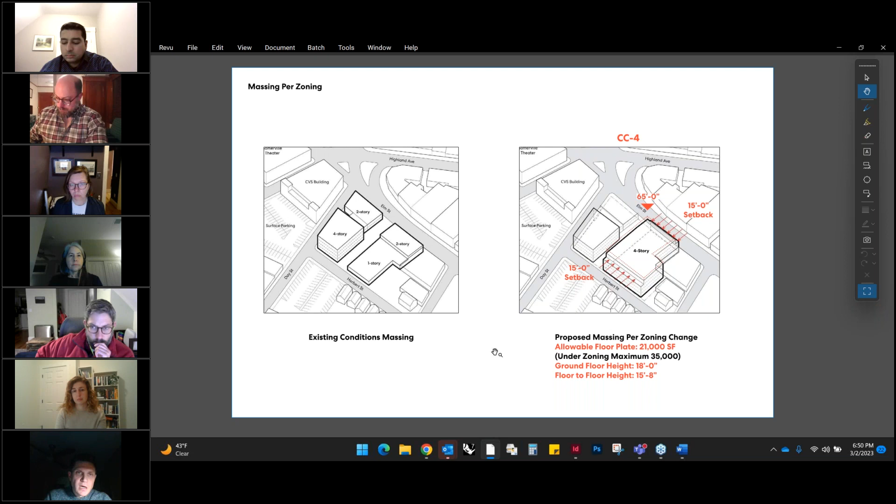But you'll notice that our floor plate, given the kind of zero lot line condition on our plaza, on the building, our floor plates are roughly 21,000 and change. The existing condition that you would know today, the two-story project or two-story volume is currently where Chipotle is. This two-story is where Starbucks is. This is the open space in between.

So when we started the project, just to understand the massing, the kind of as-of-right conditions, we could go 4 stories, but we made a very deliberate decision very early on to be as contextually sensitive to this very important place, a place near and dear to our hearts as people who spend a lot of time in Somerville, especially in Davis Square, and that the building being 4 stories on the street may not have been the most appropriate way to start the project.

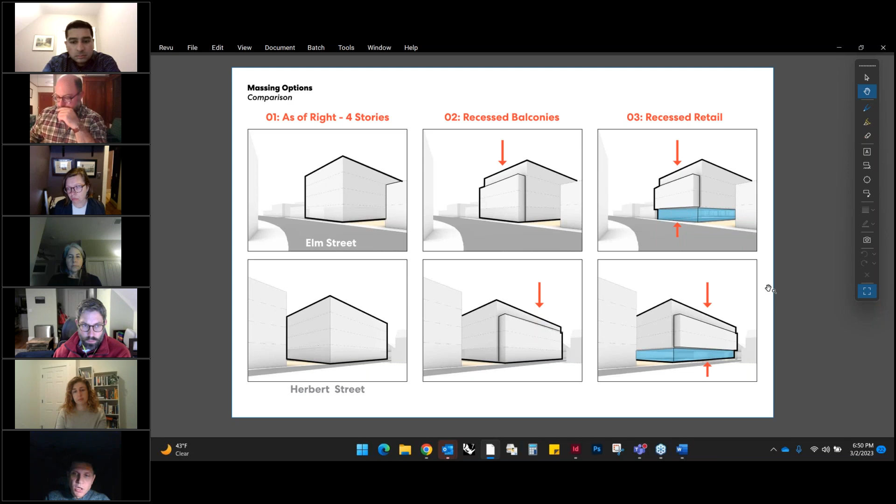So one of the first things we did, in addition to recessing the retail, was to also recess the 4th floor down to create a two-story volume at the street to bring the scale down. We've done that both on Elm and Herbert Street. That was a kind of fundamental massing decision that happened very early on.

And then once we established this kind of massing and made sure we're complying with all the zoning constraints on the property, it became very important to us to draw upon the place, to make this a place where people gather and meet, and a real catalyst for civic destination in Somerville.

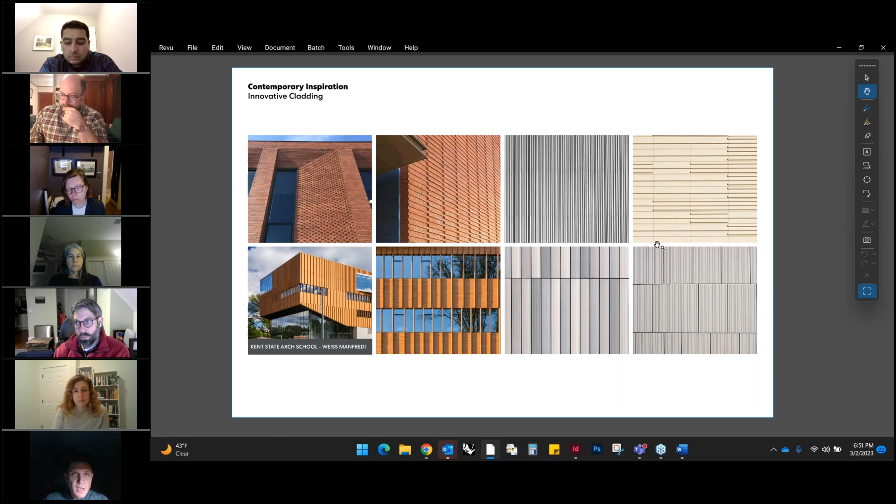So we looked at the 58-day building. We looked at a lot of the materials around the site, looking specifically at the adjacent building at 260 Elm with the kind of limestone cladding on that face and how the project might respond. And what we decided to study is that those very beautiful textures of the past could be reinterpreted into a more contemporary condition using the same material or the same tone of material. So working with pattern and texture of the brick, and also looking at more contemporary cladding like terracotta for the facade that is aligning with Elm Street and Herbert Street.

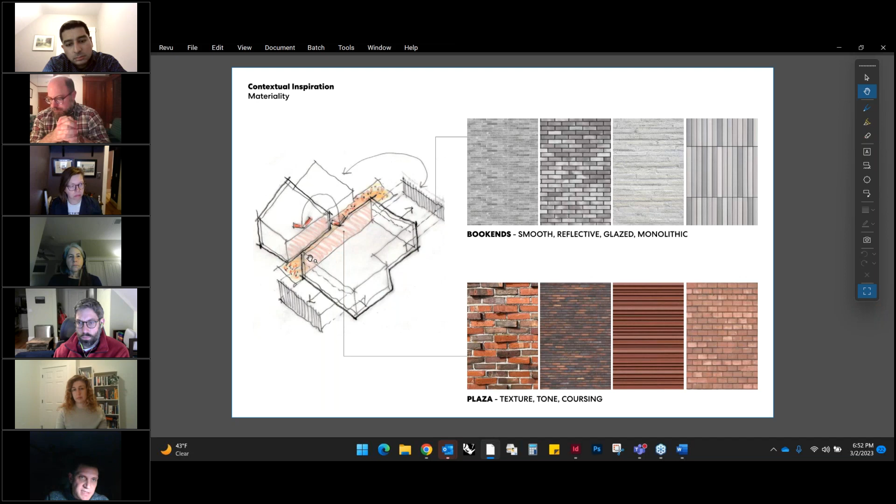The building in a way is stepping down towards the streets, but always creating a new kind of catalytic relationship with the open space. We started thinking about how the project might have two different faces: one face towards the street that becomes lighter in tone, more referential to the limestone facade you just saw, and a more contemporary masonry facade facing the existing 58-day building.

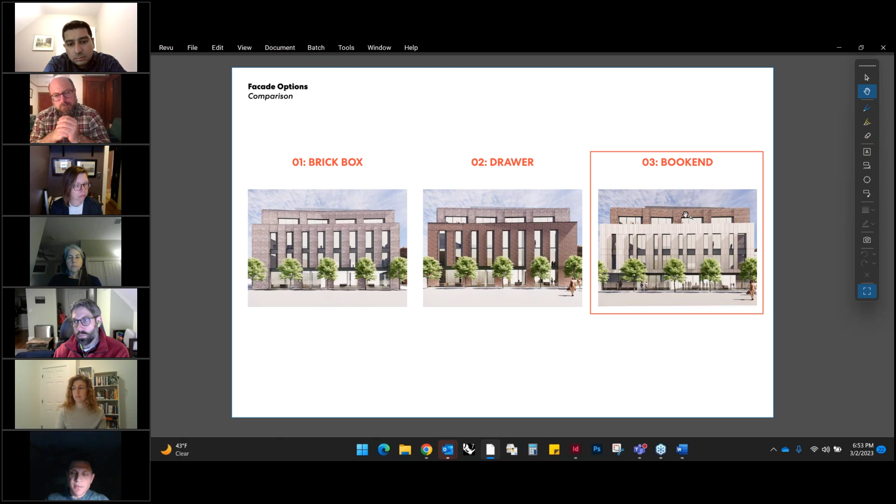When we started with the UDC process, we presented a number of facade scenarios to them. Overwhelmingly, we received a lot of support for this idea we called the bookend - the ends facing Elm and Herbert Street would be treated slightly differently to match the tone of the street condition, while the brick box behind would address the same height and scale as the brick 58-day building.

So we tried to lay out these elevations to make a very sensitive and contextual project, something that fit within the scale of the city, something that really activated the ground plane and created a new civic plaza with a direct relationship that would engage the neighborhood in a dynamic way.

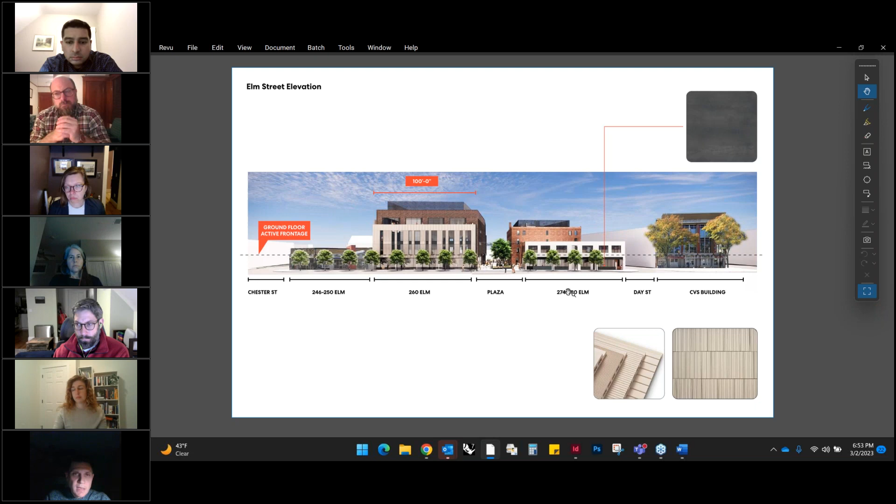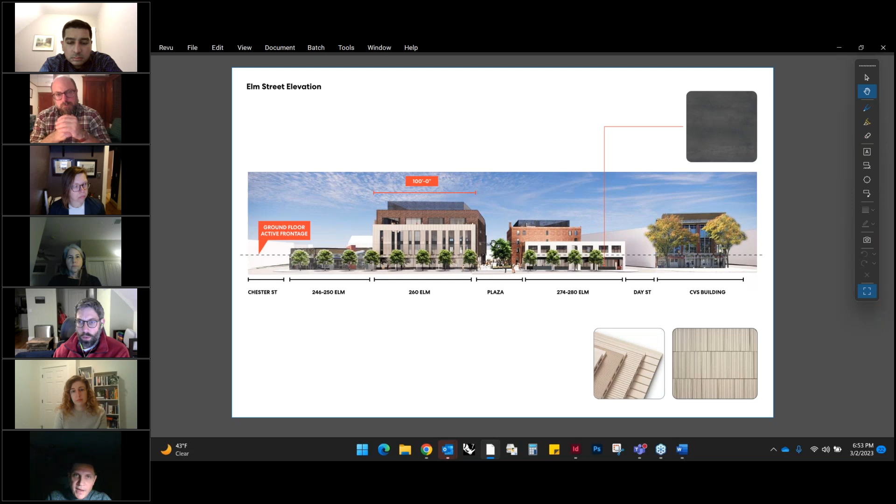You're starting to see the front elevation of the entirety of Elm Street, all these buildings you know quite well, with some very precise and discrete updates to the 274 building, letting our building create a kind of contemporary partner, or relative, to the existing condition.

At a closer scale, this is just to give you a reference - this is where Chipotle is, this is where the current Starbucks is. A couple of deliberate material moves follow.

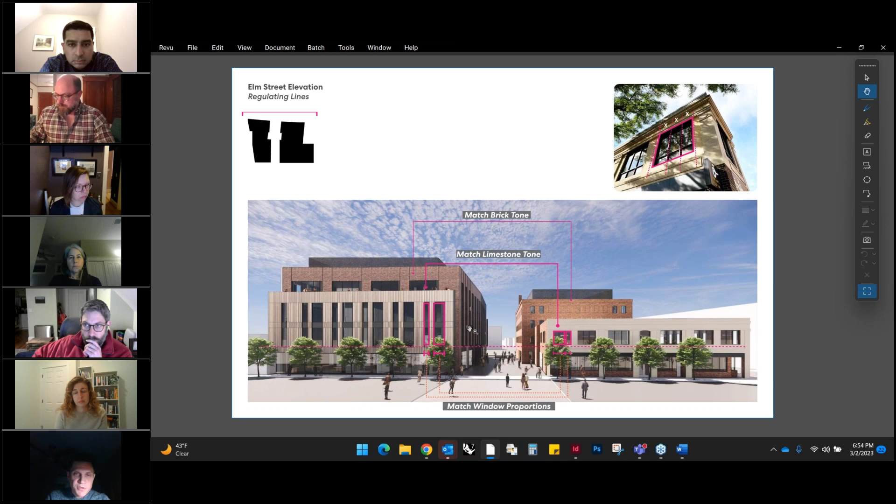Could we start to find and study materials that match the tonality of the limestone cladding that's very thin on the Elm Street side? Could that become reinterpreted with some sort of terracotta rain screen? That seemed to make some good sense.

Then the brick box behind - could that match the same kind of brick tone or texture of the 58 Day building you see in the background? Again, through the UDC process, we worked very closely with them.

We tried to make sure this Elm Street corner was open to the street and became a very engaging, almost porch-like quality. We subtracted back the retail, held it back here, and created a new covered condition - what we like to think of as a porch to the civic space, a new sheltered gathering place along Elm Street. That seemed a very productive way to continue.

We've studied the materiality of the terracotta and the signage with them - all things that we ultimately felt, after three UDC meetings, really helped the project be better.

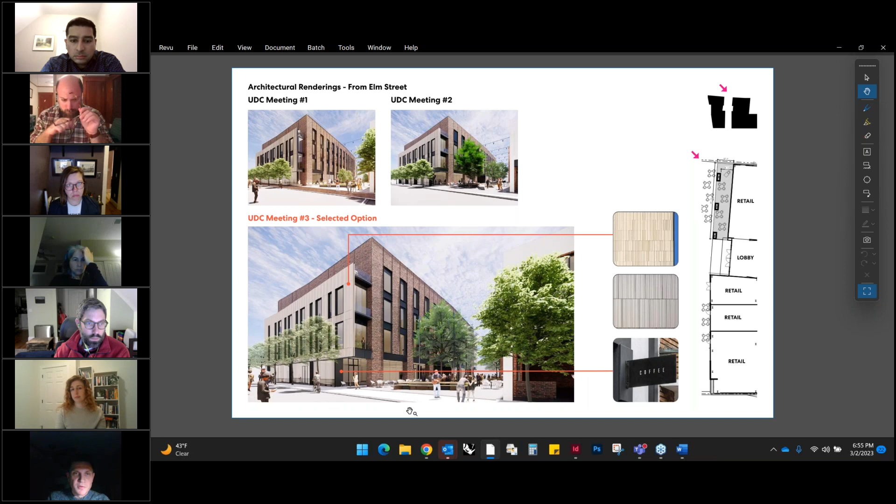I'm going to conclude with a couple of views from the Elm Street side. This is again where Chipotle is currently located - the new building here, with the activated ground floor, roughly 15,000 square feet that Welch spoke about, and the contextually modern approach to the building and architecture.

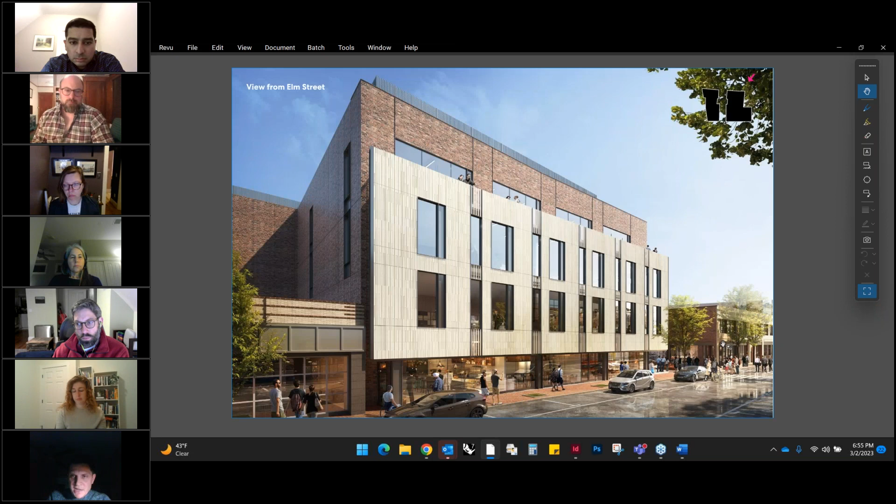Just a view looking back towards Elm Street - this is roughly where the existing bank is, trying to set up a really dynamic and engaging pedestrian experience.

Facing the existing building, this is the brick portion. You're starting to see how there's a very clear logic about how the structure meets the ground, and in those bays in between becomes retail, or a kind of mid-block lobby, which we think will really help activate the length of the entire civic space.

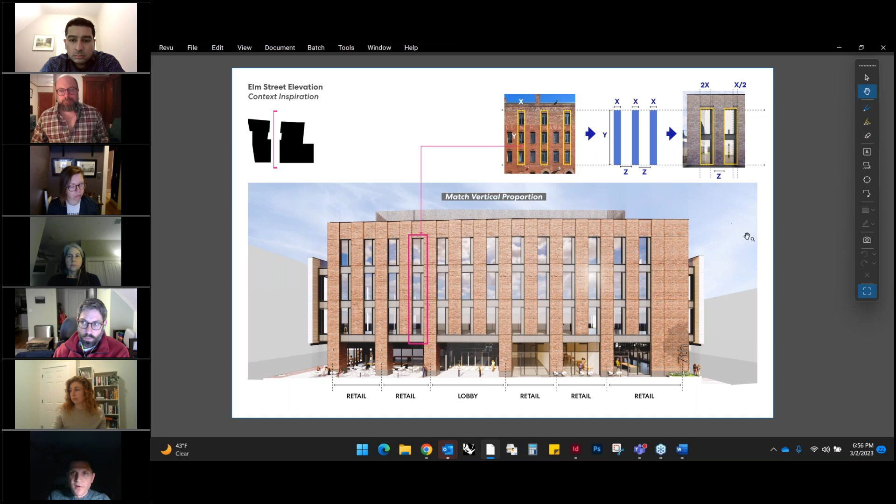Starting to look at some inspiration from the existing openings and proportions of the windows on the 58 Day building, and how they might inspire a more elongated profile that still feels related to the existing building.

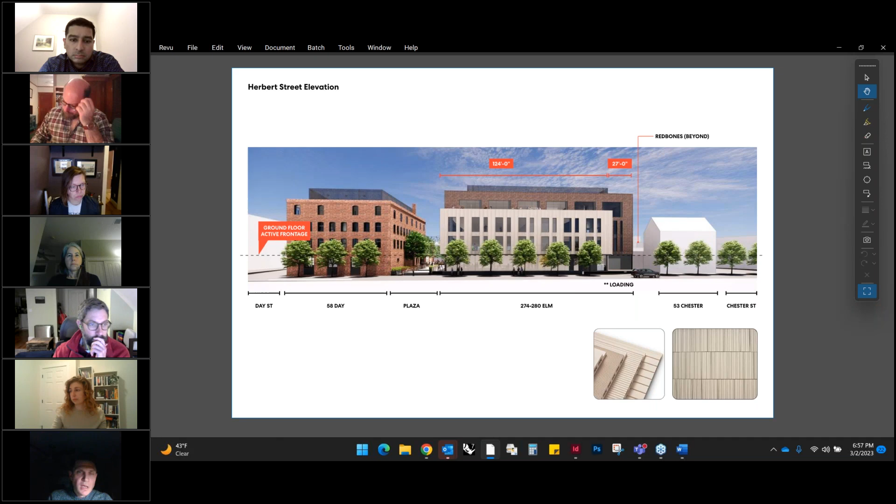The other elevation of the project that's quite important to us is the Herbert Street elevation. Again, you're seeing the side of the existing 58 Day building, and trying to create a similar type of architecture on this facade where we're not making a four-story building - bringing the scale down, having an activated retail frontage, creating a newly accessible pedestrian and civic space that Gautam will speak about in a moment. This, again, is something we studied closely with the UDC, making sure we got the right proportion and that it felt as contextual as we could make it.

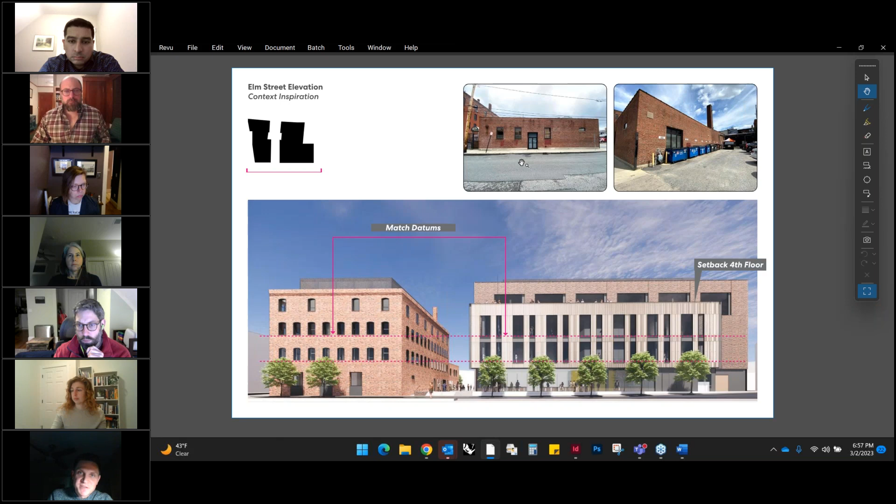A couple of ways we did this on a closer scale is really starting to look at the datums of the existing building, how those might translate or project across and inform the floor elevations of the new building, and taking what was quite tired and exhausted facade facing Herbert Street and creating a very vibrant new place.

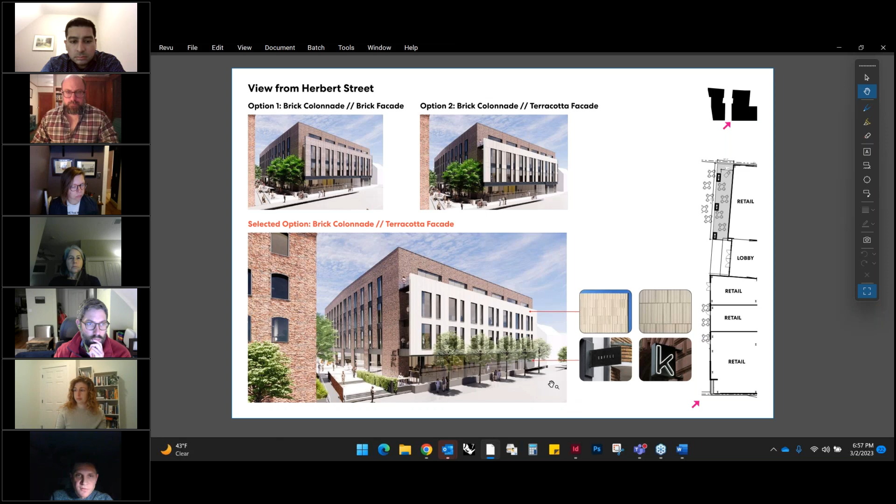Here we did a number of studies in the detailing and the tectonic, all reviewed by the UDC. They came back that these ends, these bookends if you will, could read like a very beautiful plane, crisply detailed, and very elegant, floating above the retail.

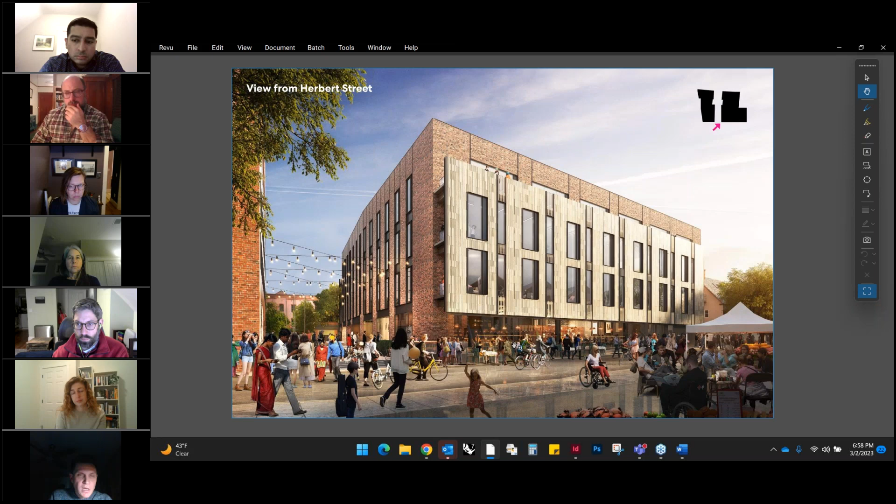So here's a final rendering of what that might feel like. This is a farmer's market going on, the very vibrant farmer's market that happens on the adjacent parking lot. That view looks back across the new Civic Plaza that Gautam will speak about in a moment, showing the potential of this new architecture at 256 Elm.

I think in addition to the architecture, it's important to talk about the programming of the building as well, now that you have a sense for it. As I mentioned earlier, we have 15,000 square feet of ground floor retail and an additional 5,000 square feet of clear story kind of retail from Herbert Street.

Of that, 6,000 square feet will be dedicated to ACE type uses. And we have been working with the city, and in our development covenant have agreed to keep 2 of the 3 Elm Street facing suites at below market rate to make them affordable for local businesses and uses.

It also stems over to outside of this project, to the renovation and work being done at 58 Day Street, which will create new retail bays both on Day Street and onto the new activated Civic Plaza, giving it a true community feel and gathering space in Davis Square, in addition to the great atmosphere that already exists there.

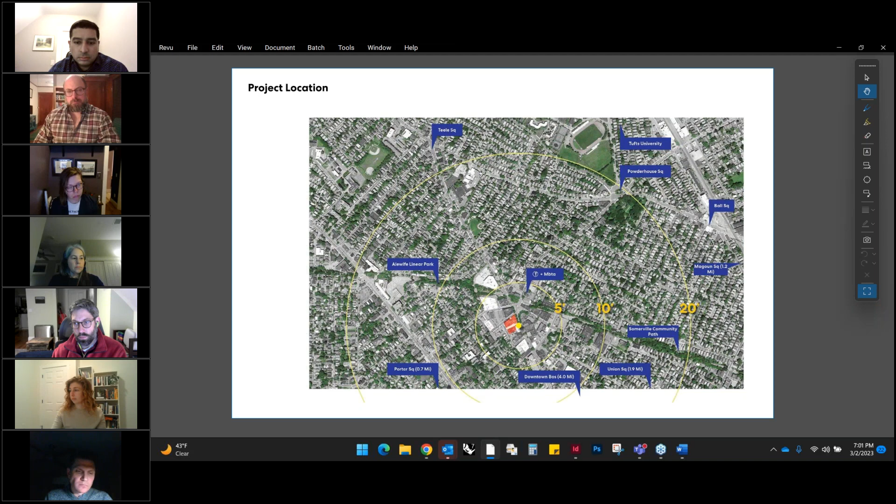So when we look at where it's located, and from our early conversations with OSPCD and staff and Courtney and others, we also looked at what open spaces exist around Davis Square right now, mapping out what opportunities they offer to the neighborhood.

We went through a very detailed process of looking at all of the types of amenities and how those open spaces are used, primarily to understand how what we are trying to do at Davis Square can differentiate itself and add to the overall open space and social fabric, creating the types of amenities and opportunities we very much need to help energize this neighborhood.

So those are the key drivers in looking at how we want to think about the Civic Plaza itself. We went through a process of rezoning where the open space has been committed as a civic space, from the owner, to make sure it is maintained as a civic open space for the city, for the neighborhood, and continues to be an integral element of the entire Davis Square culture and fabric.

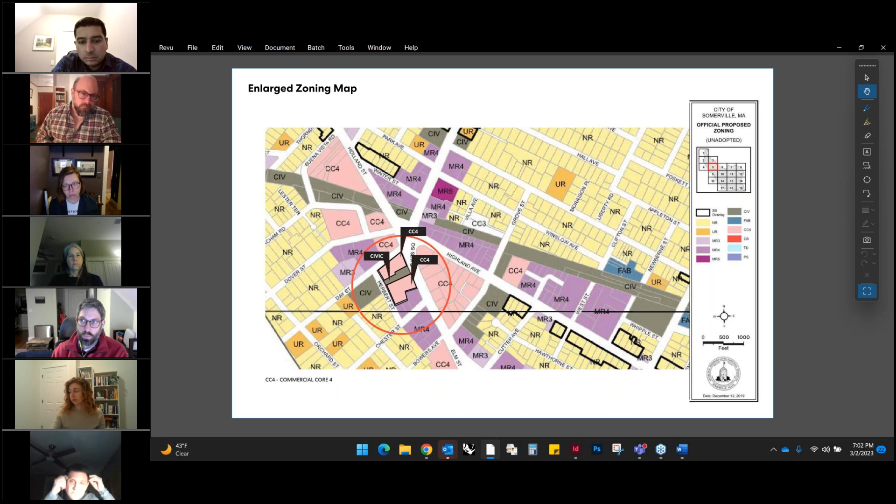From the very beginning, we thought about this open space as a key element, and we called it the seventh spoke, building upon the civic realm of Davis Square—the streets and pedestrian walkways that make this unique. We thought about how the plaza should be an extension of that civic realm, a place that helps catalyze the rest of the public realm as we think about the future of Herbert Street and some of the parcels to the southwest. So we think of this plaza as that seventh spoke.

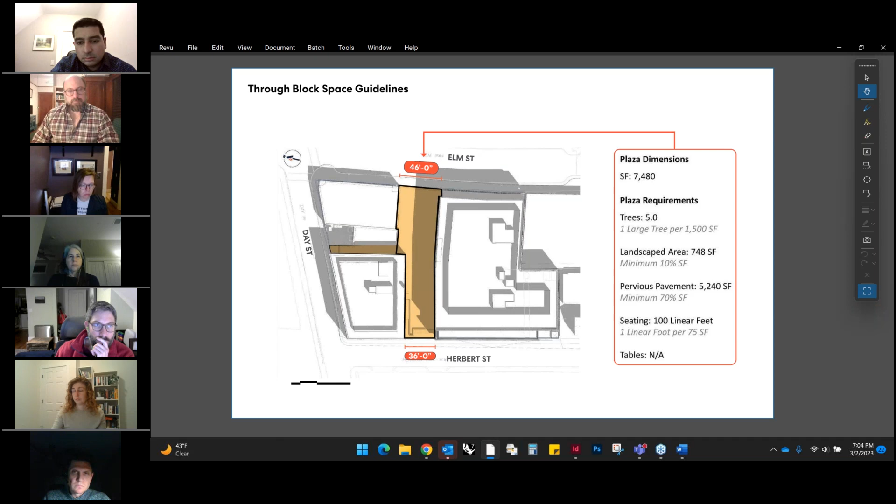It's a very linear space—I'll show you some photographs. In width, it varies from 46 feet facing Elm Street towards Herbert Street, narrowing down to about 36 feet. We didn't want to treat this as an accounting list of boxes to check, but really take the spirit of what we're trying to achieve and go above and beyond on many of these aspects, making them integral to the overall concept and design.

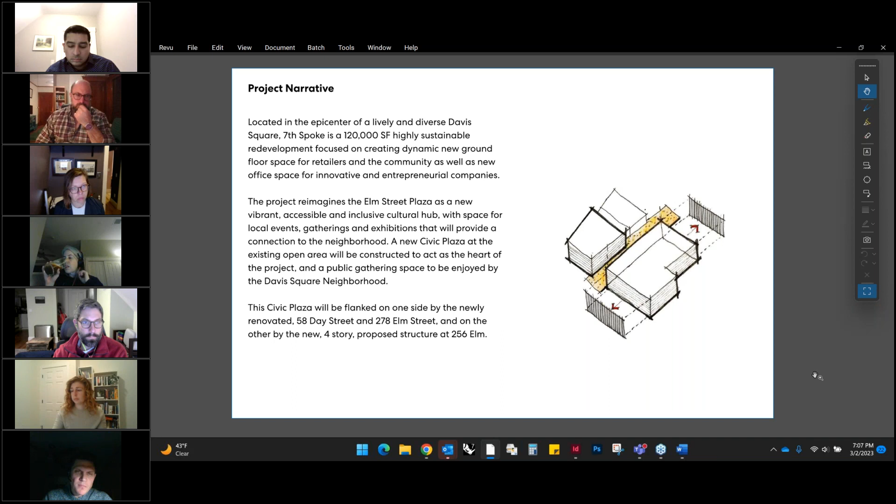From a broader context standpoint, we've always been very aware of the surrounding condition, the location of open spaces, and how it relates to pedestrian flow and transit connections—where we expect a lot of pedestrian flow to be, and how we can make it more visual and visible from view corridors where pedestrians will access this plaza, contributing to how the rest of Davis Square continues to evolve and develop over time.

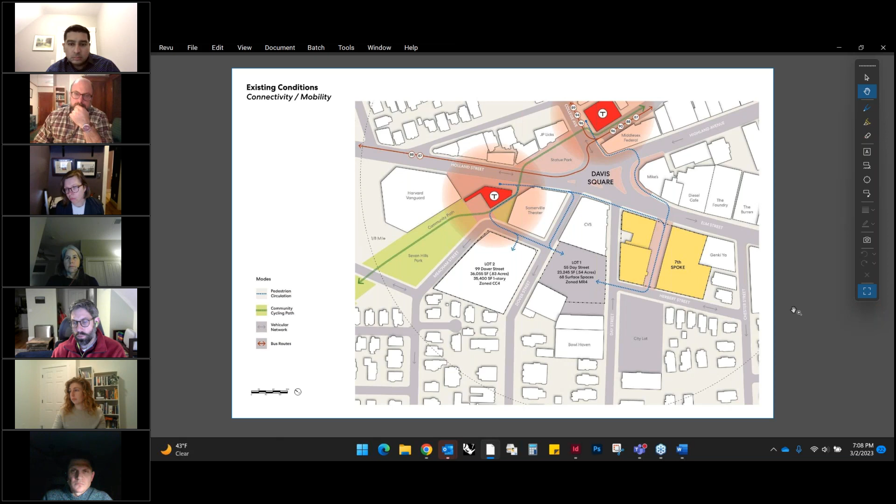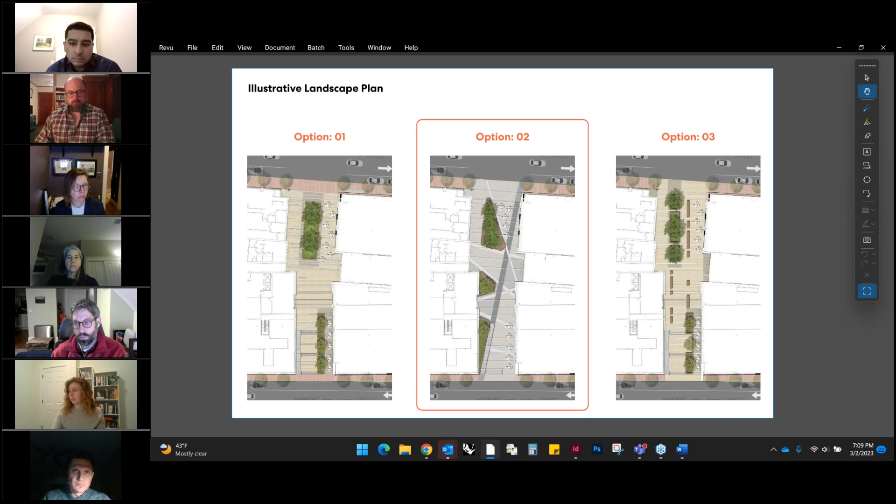Everyone, including us as designers, gravitated toward option 2, since it showed how we were evoking and inspired by the history of the uses here, like the solar enlargement studio. So we took option 2 and advanced it further. Here you can see how we continued to incorporate many elements we learned through the process, and I'll share more details now.

We've shown this plaza design in relationship to all the ground floor uses. The key has always been—as shown in the existing photographs—that this currently looks like a throughway. So we wanted to create moments of pause and activity, shaping the retail facing the development and the plaza, while also trying to create permeability.

We've made the plaza accessible by making handicap accessibility a central feature, applying universal design standards developed through conversations with UDC members. That's a concrete pavement connecting all the way from Herbert Street to Elm Street, providing ADA access as a central feature of the plaza. I'll show you renderings of how we've accomplished that.

We also wanted to add spaces for people to pause, so we've added two planters that provide large shade trees, introducing urban ecology while creating spaces for gathering and ways for people to engage with each other—incorporating the through-block guidelines as features of the design.

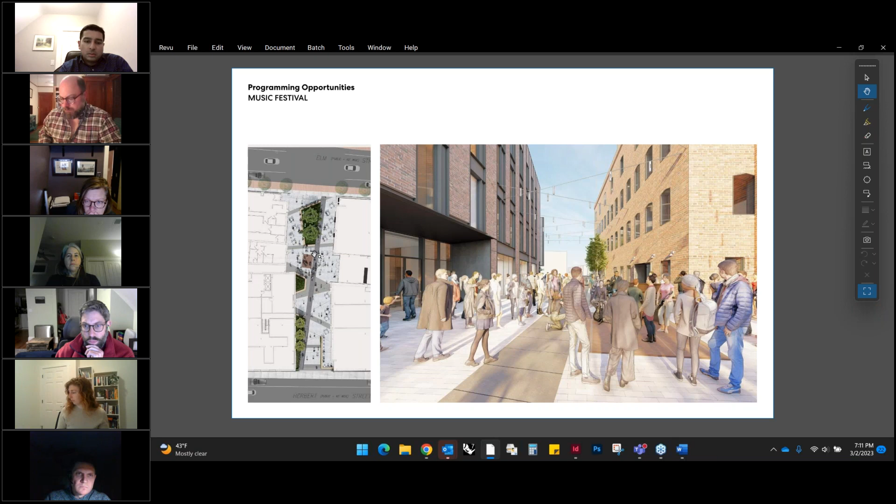Programming of this has been very critical and at the forefront of our thinking, to make sure that the space we're designing allows us the flexibility in the long term to create and program for different types of events. Whether it's a music festival, the ability to add movable stages creates opportunities for programming for the community and bringing them together, very easily possible in this type of space.

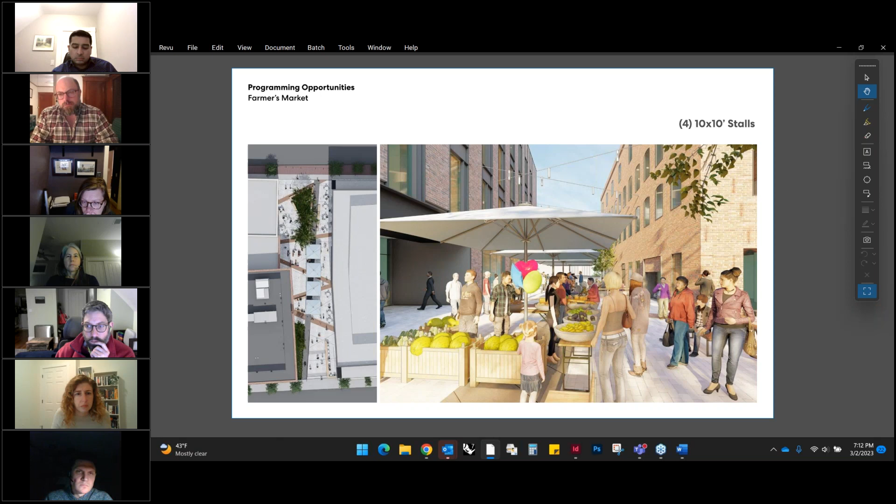Thinking about how we could extend this - sometimes in the parking lot on the south side by Herbert Street there's a farmers market. Is there a way we can extend the farmers market into the plaza as well, really bringing that activity towards Davis Square, demonstrating different ways we can accomplish that type of programming without impeding on the overall design of the plaza itself.

Similarly, if we had to have a food festival or other types of events that Somerville continues to have, this could be a great home for those - movie nights, food festivals, or other cultural events as well. This could be a great place and home for bringing the community together.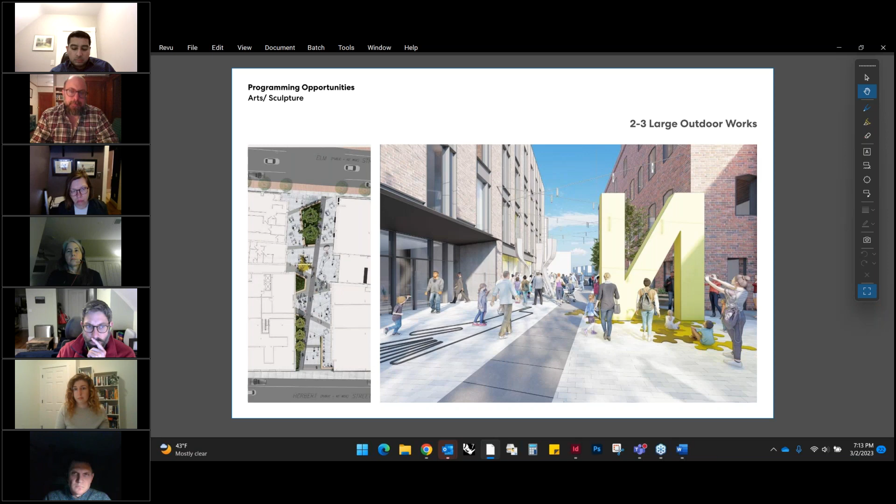I think it'll be very helpful too - we've engaged, I don't think we have the photograph here, but we also engaged with the Somerville School for some of the temporary phasing of the project, helping us activate some of the windows. If you pass by the project you can see some of those paintings on the windows, a great way to engage with the broader community and make this much more connected to the community itself.

Next slide. Here you can start to see how those finishes come together and what the overall character of the space is, really trying to maintain as much activity along the ground plane and making that transparent.

We made the entire plaza pervious paving, so we go above the requirements. We're following universal design guidelines and city guidelines, maintaining concrete sidewalks as the accessible pathways, adding diverse types of seating elements facing different ways, providing fixed as well as movable opportunities, adding more ecology and ground plane planting as a way to bring seasonal interest and create textures and colors within the plaza.

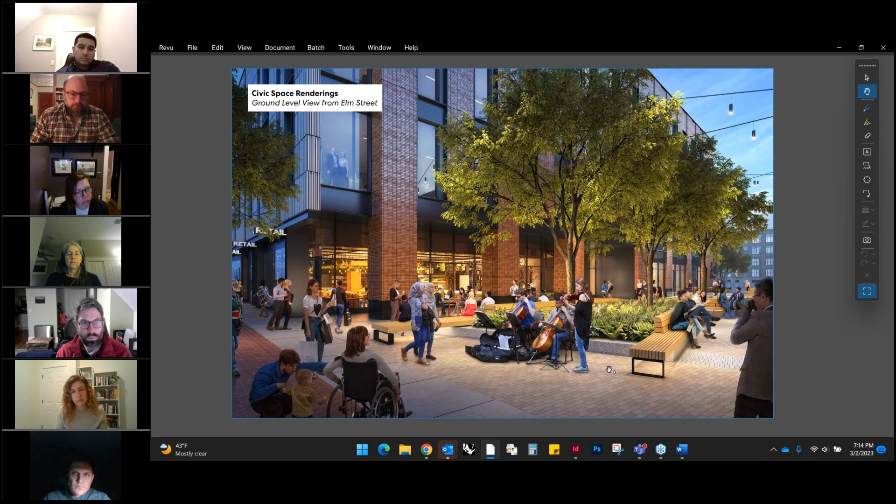We also introduced the idea of having catenary lights at the higher level as a way of creating a sense of canopy. It starts to create a sense of space spatially that you feel like you're part of, but also brings warmth and color during the fall and winter months as a way to enliven the space.

Next slide. This is when we're all the way along Herbert Street. Here you can see the street trees that will be planted as part of this project, a set of stairs, and the ramp next to it as a key feature that's part of the paving band but also a key part of the plaza element itself. Then planters on the side create a sense of gateway coming into the campus, the plaza itself.

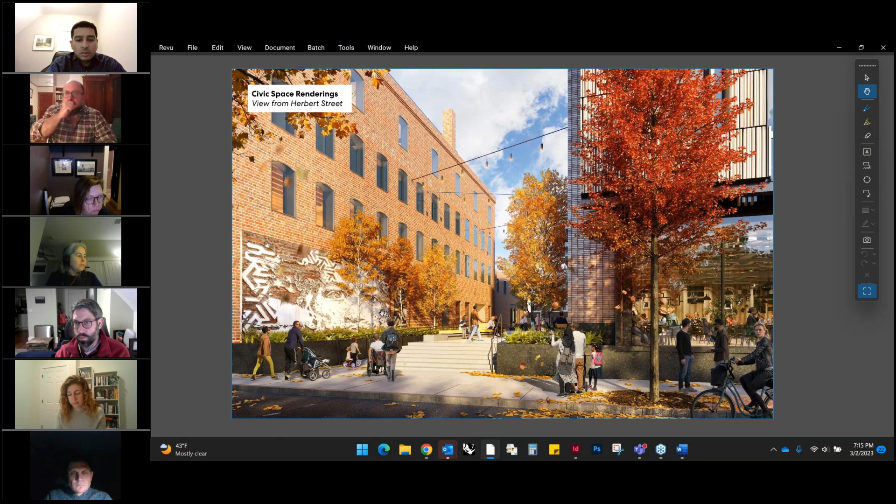And then the catenary lights extend all the way out towards Herbert Street, creating that sense of a roof to the overall space. We're looking for opportunities to engage with artists and create murals, really starting to make this about what the community and the culture of Somerville and Davis Square wants to be.

We work with PSUF and staff to make sure that all of the materials we select are not only sustainable, but also align with the design guidelines and furnishings of Somerville. We think about the plant materials, the understory planting, the light fixtures—all of these have been reviewed, and we've really tried to push over and above where we need to be from the design guidelines.

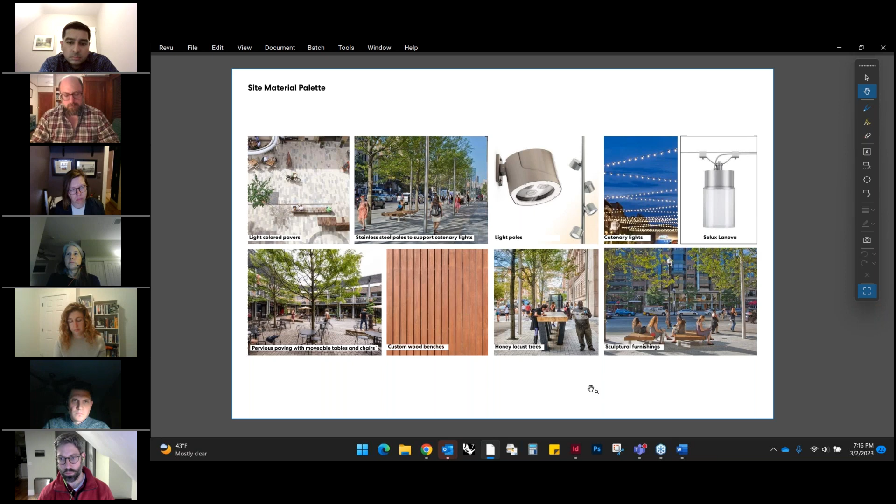Like, for example, with the pervious paving, the tree planting, and all of those elements. Now I'll pause at the last rendering, where we truly believe the way the project has evolved—not just from the urban design idea of the civic space, but how it has manifested into the built concept—would be a great extension of Davis Square, contributing to the overall public realm and its potential, and how the community could really benefit from and enjoy the space.

And with that, we'd love to hear your questions and comments. Yeah, thank you very much.

So I have a couple of questions and a couple of comments. My initial comment is, broadly, I like the presentation. I think it's pretty. I think the civic space is really well done. But my questions—some may be mitigated by a staff review of the recently submitted materials, so if this is something addressed by the staff memorandum, I apologize.

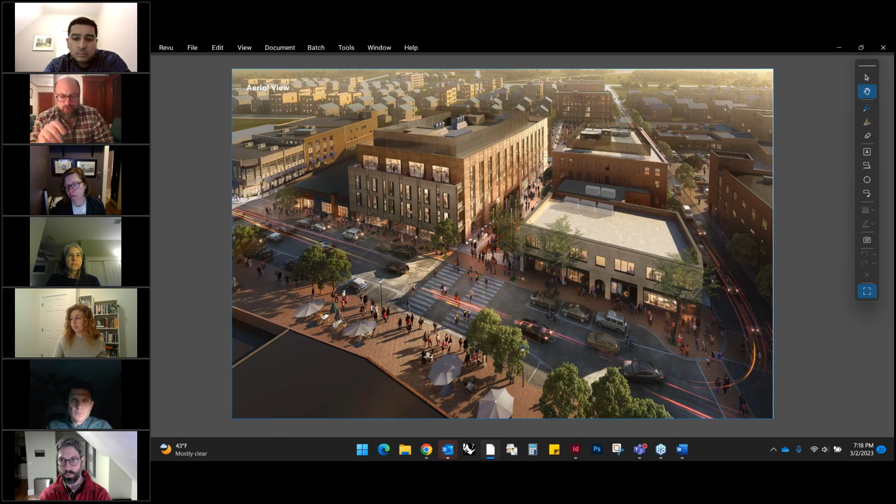My first question is about the loading zone area. It had been presented on Herbert Street, and as I recall, and in your rendering, there are residential homes right behind it. What made the decision to include loading and trash areas directly across the street from people's homes as opposed to elsewhere on the property?

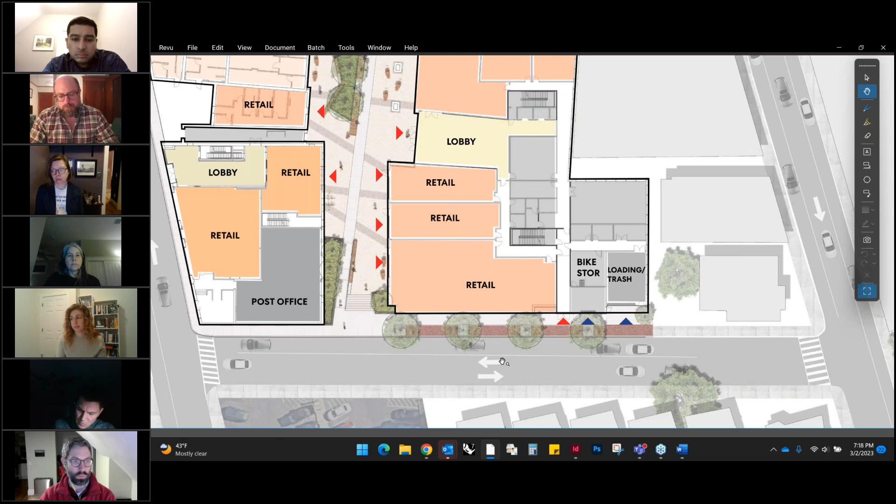So this is Welch Lyles with Asana Partners, I'm happy to answer that. Really, it is how the property functions currently. You can ask residents—at a lot of our community meetings, the current parking lot and traffic situation is an open lot where the dumpsters are exposed on the street. They were actually excited that we were internalizing everything, because it's a major improvement on the current situation. So we do feel like it's very much an improvement.

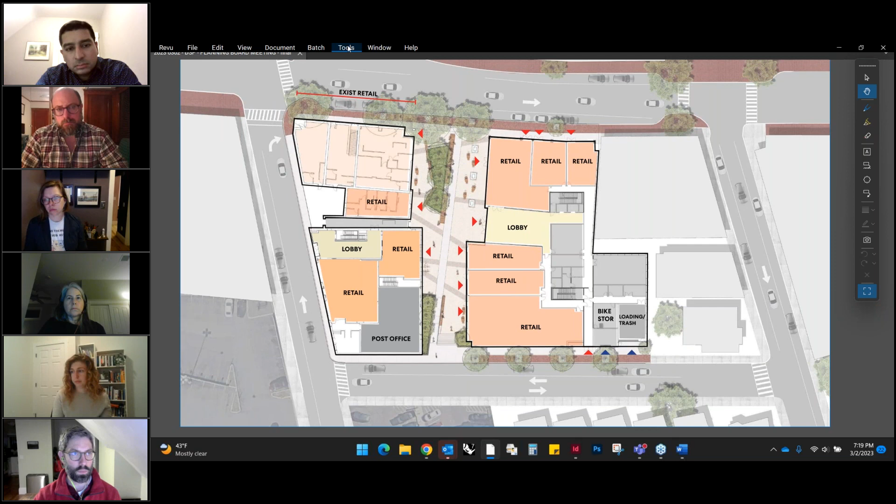The loading and trash door will have an overhead door that we see as an opportunity for art, a mural or some type of community art piece, so that when it's down it's not just an overhead door—it's something exciting, maybe an Instagrammable moment. So that's the improvement piece. And really it just came from functionality—loading on Elm Street really wasn't possible, so there has to be some sort of loading and trash just functionally.

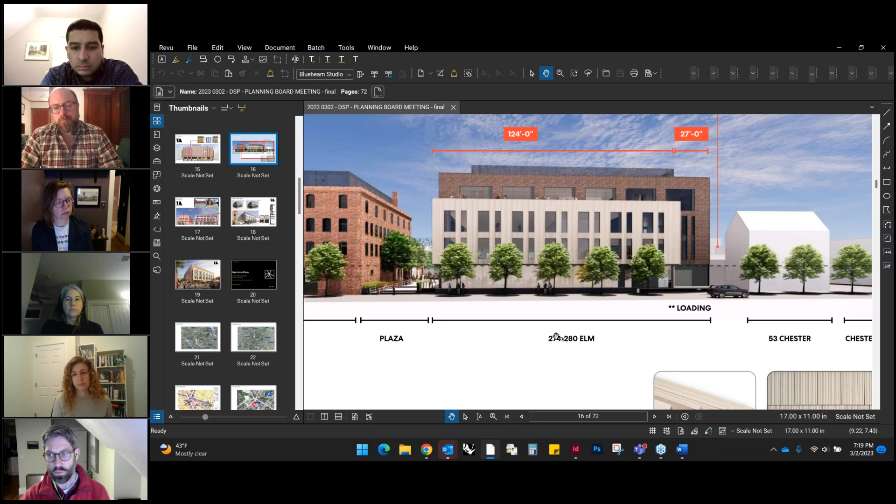So we've tried to make it as nice as we can off of Herbert, knowing we had to pick a corner. We love to try to make four-sided buildings as much as we can, and we always run into the problem where we kind of paint ourselves out of it, but you do have to have that one little section just from a functional perspective.

Yeah, no, I respect that. I also respect that you indicated early on, with the renderings and your comment just now, that you tried to make a building that's appealing on each side. I can't tell you how many times this board has seen buildings that just have the back of a building, and it's clearly the back of a building—not exciting, not engaging, disrespectful to anybody on any other side. So I do appreciate that, thank you.

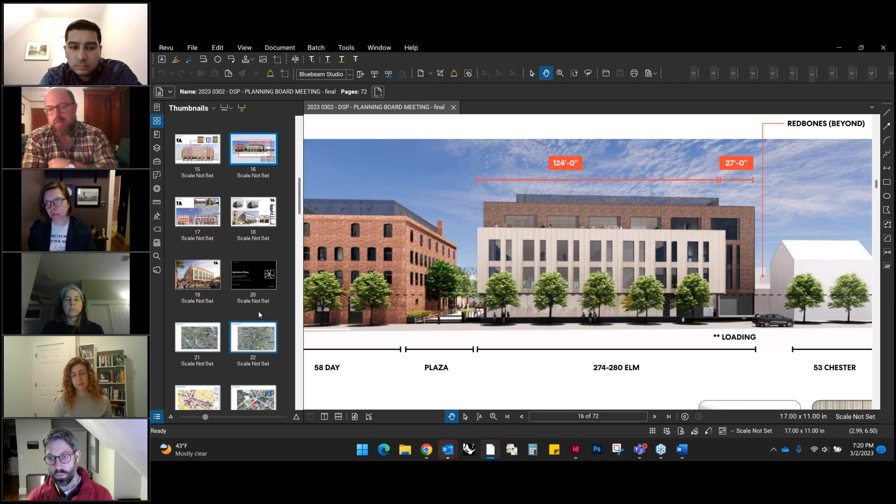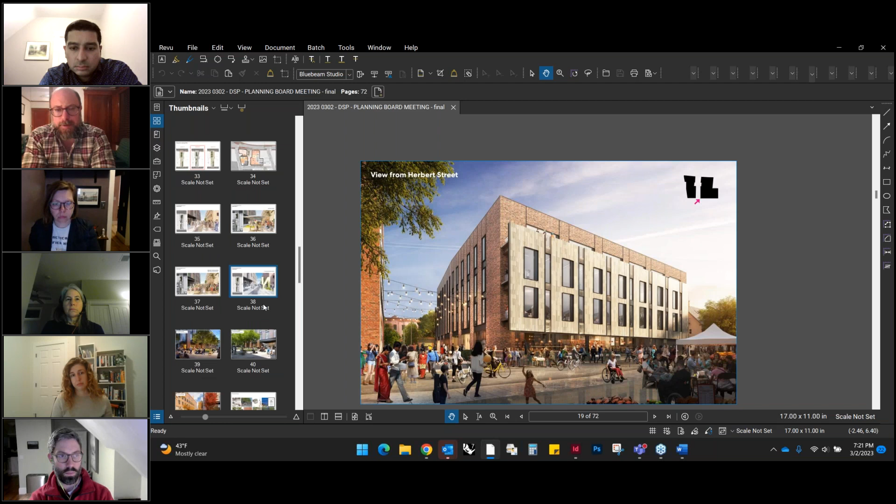Now, when I was reviewing the materials, I was looking at notes from some of the neighborhood meetings you've held, and some of the concerns I saw potentially have to do with the Herbert Street side, since residential homes sit there. We're going effectively from a one-story building across the street from these folks to a three-story with a fourth setback. Do you have any shadow studies into how that's going to impact people's use of their homes and lighting? Thank you.

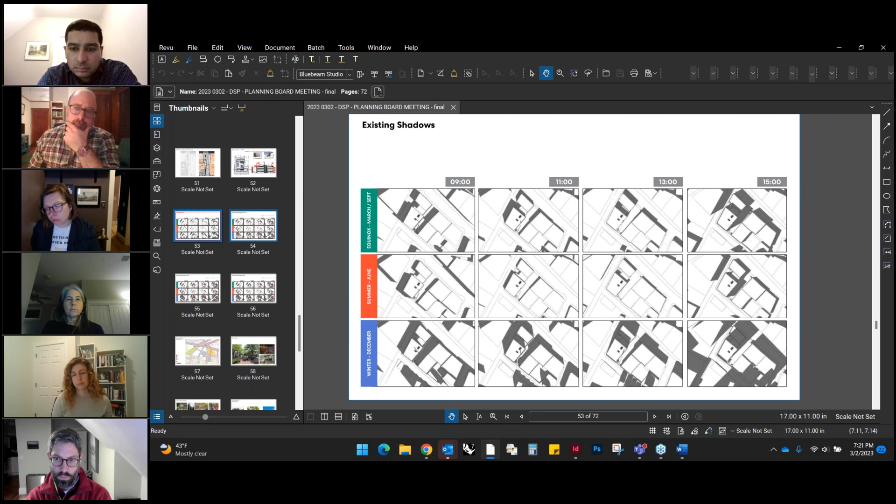Chairman Capigliano, this came up in both the neighborhood meetings and through the UDC, and we tried to be quite rigorous and follow all of the Somerville zoning requirements for times of year and times of day. What we tried to show is that the existing massing is shown here in red, and our building is adding height, so there's going to be more shadow. But as the sun moves, those shadows are always cast away from the homes on the south side of the project, so the new building massing does not affect those homes.

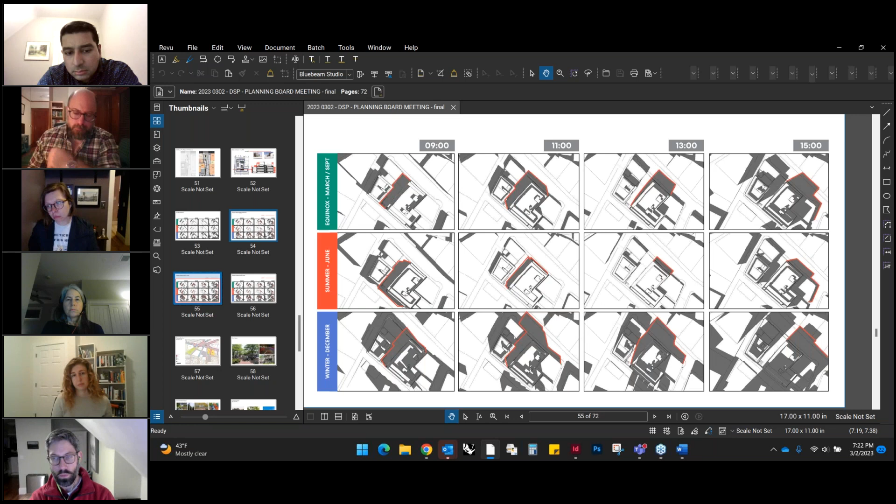We were also asked about the height of the penthouse screen and how that might affect the shade on the plaza. What we tried to show is that there was really no effect—no change between what the building would cast with a screen, because it's set back so far from the parapet that it didn't influence any of the shadows on the plaza.

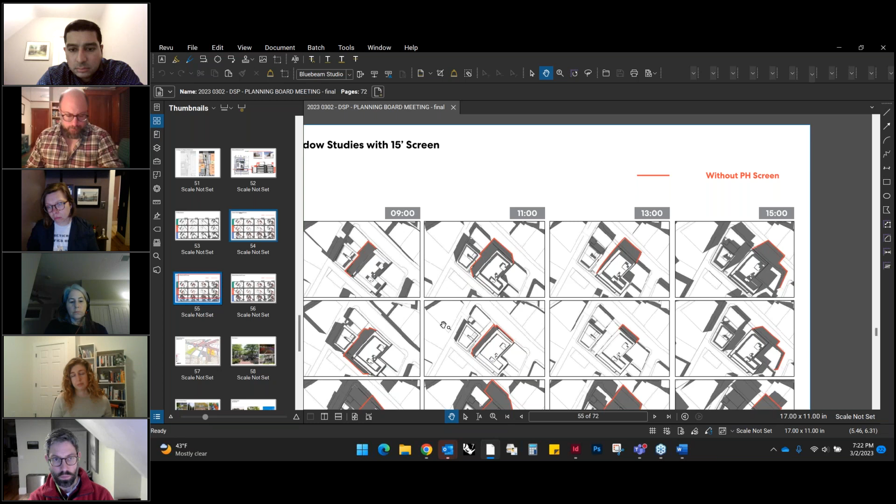My next question is on the way you describe the project as a series of phases of development. One of the phases incorporated the Day Street parcel that you have. I don't think I saw any part of this presentation that had to do with the development on the Day Street projects. I'm just curious as to why that was considered part of the phasing but not incorporated in this presentation.

Yeah, I'm happy to speak to that. The two buildings along Day Street, 58 Day and 276 Elm Street at the front, are both existing buildings. We have already completed some facade improvements and interior renovations, and are planning a full redevelopment and renovation of both existing buildings and conversion. Since the majority of that work is interior, it did not require the same site plan and planning approval processes as the other two projects did. But both buildings are being fully improved. We went through a minor site plan approval for the window replacements and new storefront work, and similarly we'll be going through a minor site plan approval for some of the screening associated with those projects. Everything else will remain on the interiors.

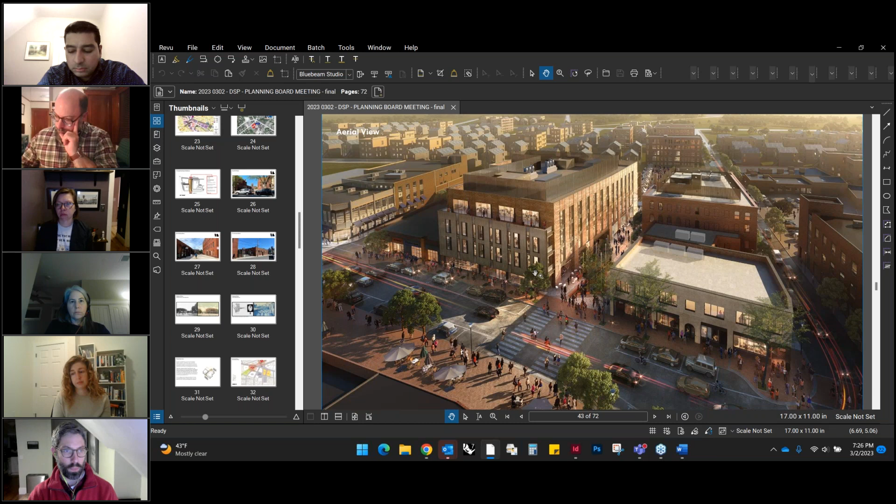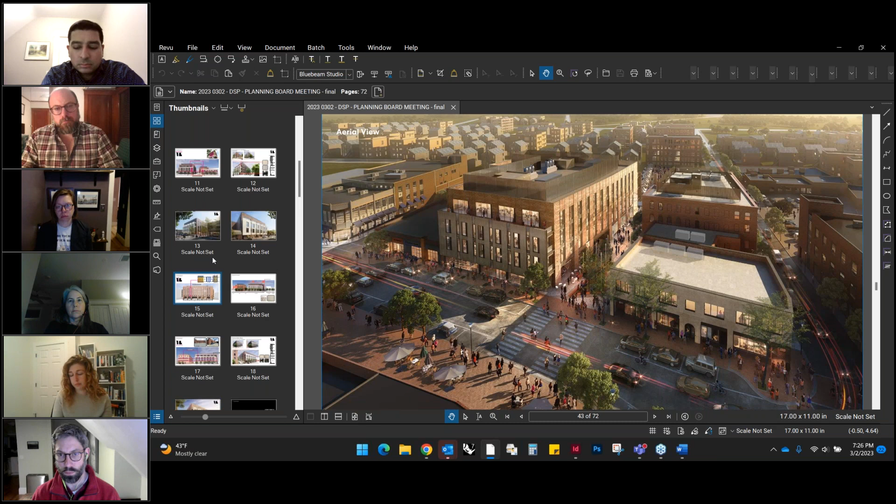Sure, happy to speak to that as well. For the existing building we're planning to replace, many of those tenants' terms had naturally expired and they'd stayed on a month-to-month basis. We've worked with several to relocate to other spaces within the square. Davis Square Family Practice just opened a new store down the street. Sola Salons similarly. Sugidama is under construction on a new restaurant on Elm Street that we've been helping them with, and they'll be opening in a few weeks and relocating. Starbucks—probably the least of everyone's concerns—will actually be relocating back into that current corner once construction's done. Boston Tattoo will be opening in a new spot in one of the existing buildings at 276 Elm Street, just across the plaza. We've spent a lot of time working with each tenant in place, working with the Economic Development Office to help find them new homes and try to keep them in the square.

And just like you guys, we appreciate those businesses here. We think it's the authenticity that drives everybody to want to be in Davis Square, so we definitely want to work and keep them. We also have the post office at 58 Day, who will be remaining in place. They'll be downsizing into a smaller section that aligns more with their modern footprint, and opening up some new retail space next to them on the corner there.

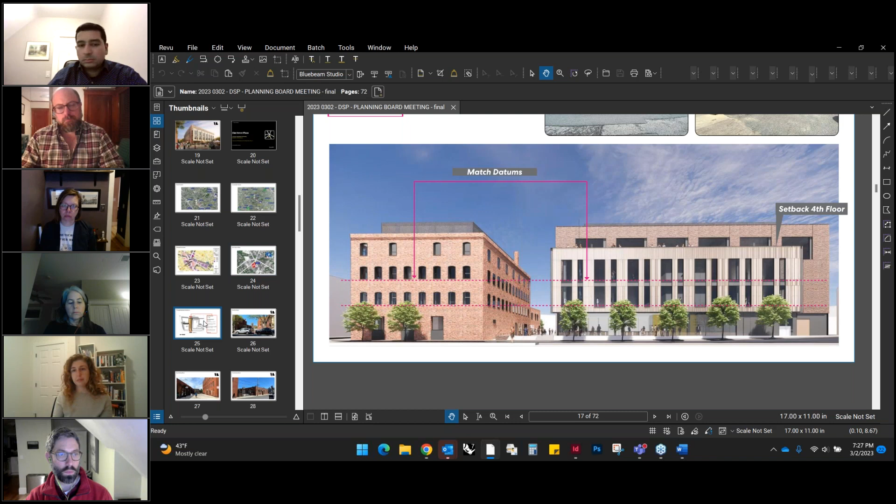Yeah, have definitely worked with everyone as much as we can. And for those other tenants, we worked through relocation packages, and I think have come to a fair and comparable agreement for everybody.

Thank you, those are the questions I have at this point. I'd like to invite my colleagues to make comments or ask questions as they would like. I see Amelia's hand, I would open the floor up to our distinguished vice chair.

Thank you, Mr. Chair. I have some overarching feedback on this application that I would like to share, and some additional specific comments and concerns that I'd be happy to discuss with the applicant after public testimony. But before we move on to that phase, if I can just say overall.

I have a lot of concerns with this application and had fundamentally a difficult time following it as it was submitted to us in the review process. Finding it sort of confusing in some areas and sloppy in others, which really confused me coming from a firm as sophisticated as Asana, working with a design firm as sophisticated as Perkins and Will.

The project narrative doesn't really reference anything that's going on in the balance of this project in terms of the other development project you have underway. It's not clear from that narrative whether Seven Spoke refers to the entire block development, to the specific building under review tonight in this application, or what.

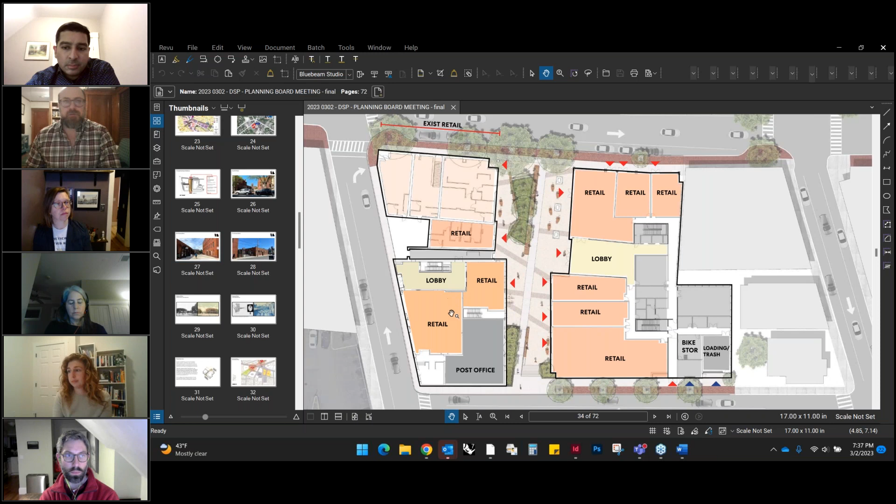Thanks, Marissa, and thank you, Erin. Did you have any other comments before I? No, I'm all set, Mr. Chair. Thank you very much. Okay, does anybody else have any comments or questions of staff or of the applicant before I open it up to public testimony?

Yes, Michael. Michael, I think you're muted. Thank you, Mr. Chair—first, hopefully last.

I just had a couple quick comments regarding the sustainability documents that we have, specifically looking at the ones under 270 Elm Street. I see some comments about not having a permanent irrigation system being installed in the park, and I also know it's my understanding that your group is going to be responsible for the long-term maintenance of this area. I was wondering if you could talk to your intentions for the general maintenance plan with the vegetation and keeping it a healthy green space. As you showed in some earlier pictures, that corridor is pretty barren, and I'm really excited about the green space here—just want to make sure you've got a solid plan you can stick with.

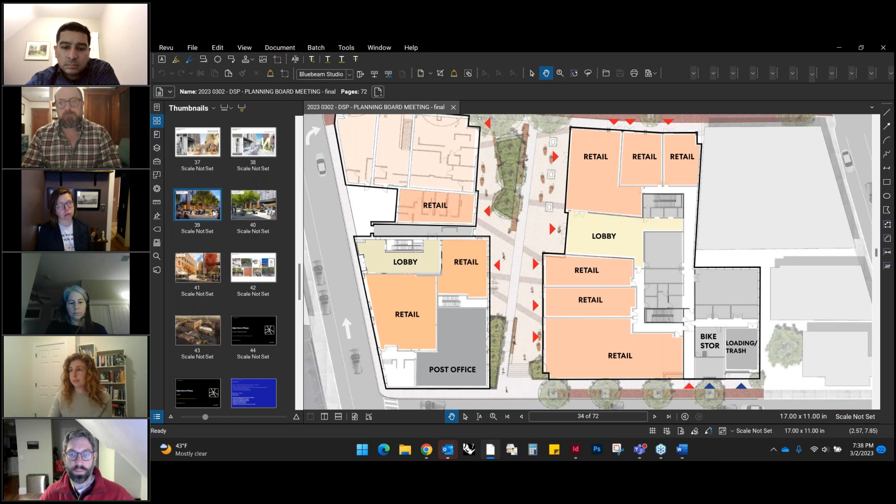Yes, happy to speak to that. We are in the process of finalizing an easement and maintenance agreement with the City of Somerville that will both keep this as public open access as part of the civic space, and meet everyone's goals for more pedestrian space, aligning with the Davis Square plan discussed earlier. With that, we'll also have a maintenance agreement outlining landscaping, trash, and cleanliness, and in general we'll have on-site engineers and porters taking care of the building and the space.

Because as a retail-focused and retail-first investor, we want people to be there. We want it to be a lively, beautiful place where you can hang out, shop, and spend your time. That's our intention, and those are the documents we're working through to make sure it's set in stone.

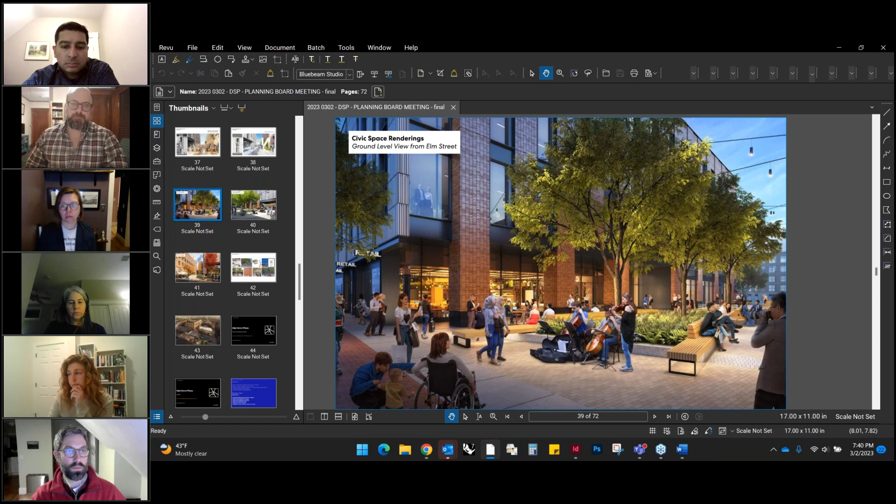Okay, great. And then I had one other element regarding the amount of retail and lab space. I assume the gas engine system you're putting on the roof is there for backup—can you confirm that, as opposed to primary power use? That's right, it's emergency power.

Okay, great. You also have a comment in your application about the option of purchasing carbon offsets. I appreciate it's very challenging to commit to absolutely buying 100% carbon offsets, not knowing market prices and how that can evolve over a 5 or 10 year term. Can you speak a bit more to that intention, so we can continue to hear this voice that you want to make it a very sustainable development, one that won't have a negative impact on local emissions or the power grid?

Yeah, certainly. It is meeting the LEED Platinum requirements. There is no gas servicing to any of the equipment or the upper floors, and we are currently working with Eversource on options for purchasing those, along with the overall engineering for the building. We don't have an exact commitment worked out with them yet, but I can try to provide a better update in two weeks when we come back and see exactly where we stand with those purchases.

Okay, great, I really appreciate it. It's been excellent that you guys are focusing on the green space as the heart of the project and really trying to develop that as a focal point. I think being consistent with this sustainability throughout the rest of the project would be greatly appreciated. So thank you, thank you.

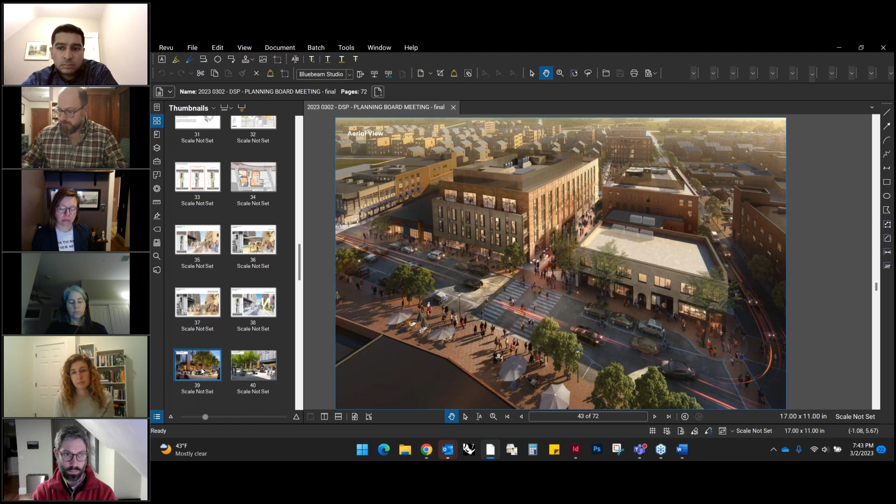So for the lab building, a few of my thoughts are, I do really appreciate you cleaning up that very bare plaza as it is right now. And what I desperately want to see in the city is vertical green space that is not trees. Anytime a new building is built, you have the opportunity to create vertical infrastructure on the surface of the building that will allow for vines.

And I'm talking about lianas or twining vines, so you're not going to have to worry about the suckering. So things like Lonicera sempervirens, that's our native coral honeysuckle, or Virginia virgin's bower, or Dutchman's pipe, all really spectacular native plants that will just really enliven the space and create more nature in the area.

So that would be one recommendation. The other is, I don't see any solar panels on your roof. I know commercial lab buildings, outside of mechanicals, it's like, well, how much space do you have? But looking at the renderings, you've got a significant amount of space. So I would say, would you consider doing some green roof or some biosolar? Again, with our green space, I'm a green space advocate. Any little bit of space that we can have on our roofs for native meadows really helps our pollinators trying to survive this climate crisis, sixth mass extinction that we're in.

I don't see a timer, so I don't know if I'm coming up on time, but those are some of my concerns. I do wonder if there's going to be any sort of community space or community room. And I think those are my thoughts for now. In general, I support this project. Just love to see it greened up even more. Thank you.

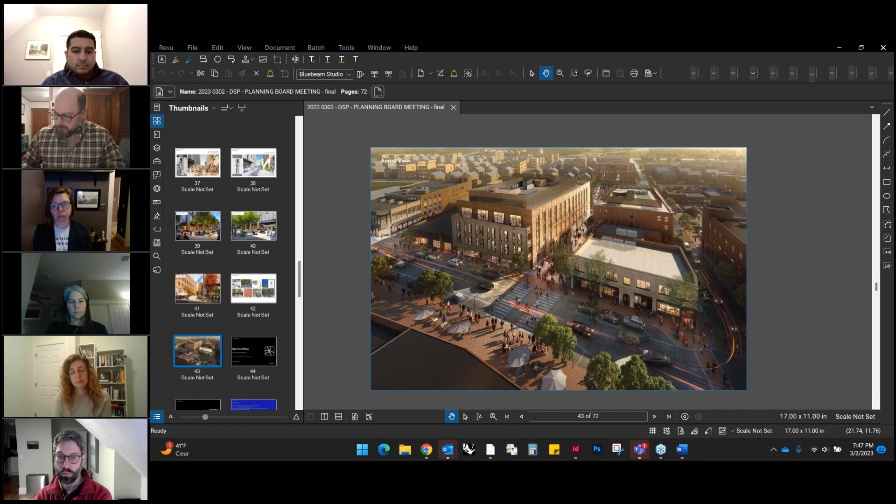Teresa speaking. Tori, you have been unmuted. You are self-muted on your end. Hi again, Tori Antonina, 65 Boston Street. So I just took a look at the landscaping plans, and for me, when I look at a landscaping plan, what I really want to see is what are you planting? And I don't see any. Does not seem to be any plant palette. It just says trees and vegetative matter, which is alarming unless I'm missing something.

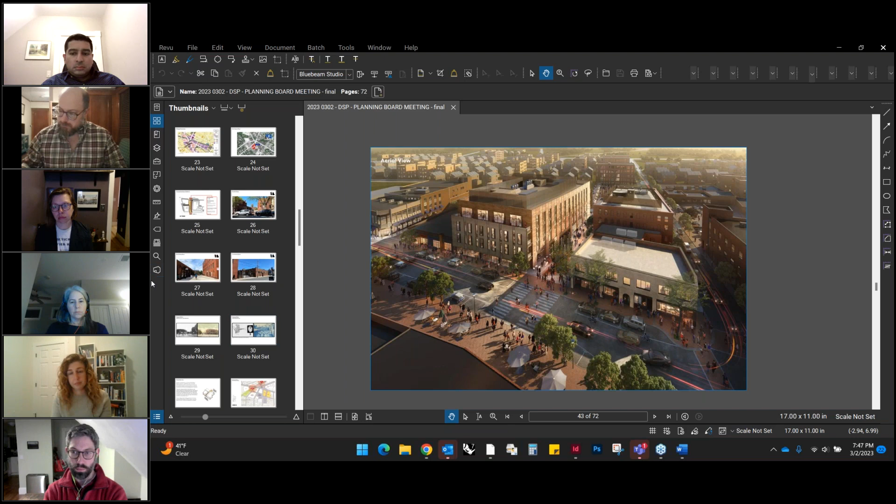Because if the landscape designer is on, I'm sure he knows the importance of planting any indigenous species, plant species, to whatever area you're working on, because insects evolved in spaces where they had indigenous plants. So they depend on native plants. So in plazas, there's a minimum requirement of 50% native species per our native planting ordinance, but that's really woeful. There's no reason you can't be putting in 100% native plants, stunning, beautiful, blowing any other plants out of the water that we think we quote unquote need as sort of what we've been habituated to.

So but where are those plans? How do I look at them? And just looking at the design review recommendation for the civic space, it's not as meaty as those documents usually are. So I just hope you can get the actual species list in there. I had something else to say, but I forget what it was. So just like to see more detailed plans on that. Thank you.

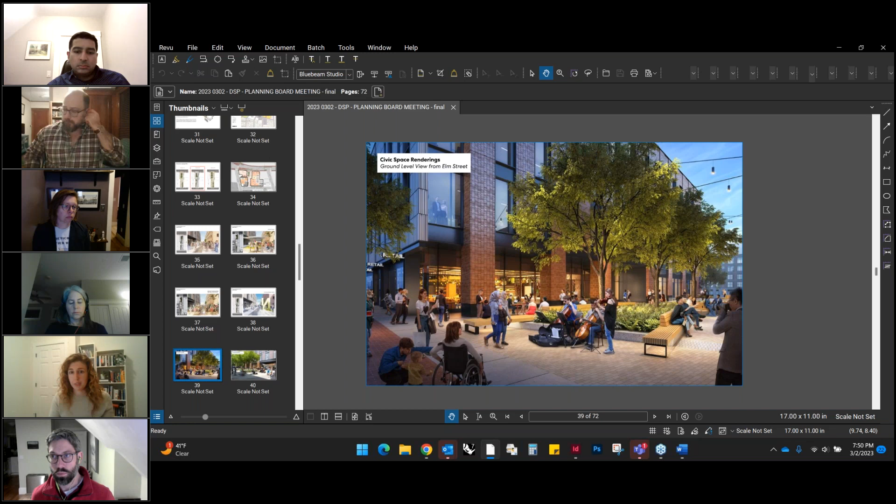I think it's a great renovation of this space and the addition of something that is appropriate, contextual, and well scaled. I am appreciative of the sustainability requirements that have been responded to appropriately. I have a couple of minor concerns that I'm hoping the applicant can answer either in this meeting or in a future meeting in this process. Please don't feel compelled to answer on your feet right now necessarily.

They are on the topics of open space, architecture, and loading. For open space, this is actually quite tied to Tori's comment about not having the tree specifications, but do we feel confident that these trees will thrive in the relatively shaded environment between these two buildings? Has the species been selected or specified such that we have a high degree of confidence in that? I'm sure the answer is yes, but as one member of this board, I would feel happier hearing you articulate it.

I'd like to understand the balance of the civic space, if any, that will be given up to tenant space, or the breakdown of tenant patio area versus truly public space where you don't need to have made a purchase to sit down, if that's something you're prepared to articulate now or in the future.

On loading, I wanted to raise the question: I see that the turning plan reflects SU-30s going into the new loading bay, and wanted to hear you confirm that trucks of that size, which I think are standard FedEx box truck kind of size, will be sufficient for the loading of a building of this scale with this mix of uses.

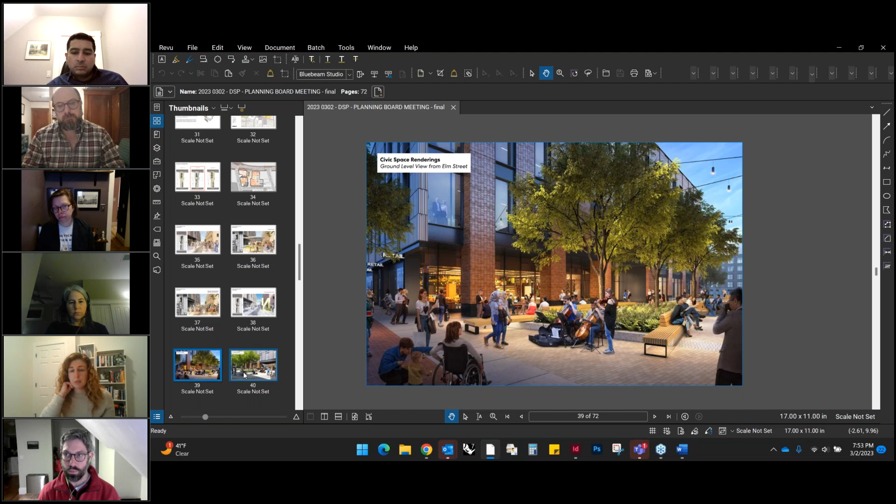Finally, on the articulation of the interior alleyway, you're now proposing that it respond to the Somerville neighborhood character and have clearly given a lot of thought to the activation of this as a civic space in the spirit of our artistic, quirky community. I do think the facade along the alley space is a little bit clinical, and I would love to hear if you will leave flexibility for tenants to personalize, modify some of that space so it has more neighborhood character. That might just be about the signage plan. But I feel you had all the right things in the aspirational renderings, and I hope the storefront bay design you've specified will allow for that flexibility in practice, I guess. So, thank you.

Does anybody else have anything they would like to add for the good of this application before we move to continue them? Okay, seeing none, I want to thank the applicant for the presentation. Chair? For comments. Yes, oh, I missed Erin. I'm sorry, you're also small on these stupid boxes. No worries. Thank you, Mr. Chair.

I guess again, just maybe a couple comments for the applicant team, no need to comment now, but I would love to discuss them later. The applicant team made comment that they are maybe more experienced as a retail space investor. Given that this is a lab building in a densely populated area, I would really like to dive into how they've approached that as a design team to make sure the shell of this building will be well suited to the proposed use.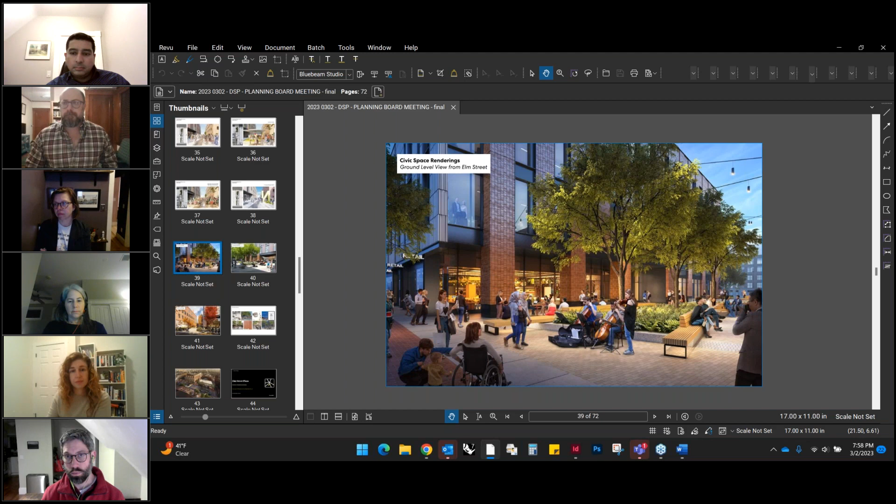This is Raisa speaking. Michael Capilano. Aye. Amelia Aboff. Aye. Erin Gino. Aye. Jahan Habib. Aye. Michael McNeely. Aye. Debbie Howard Easton. Aye. We have a unanimous vote to continue these agenda items.

We will see you in a few weeks. Thank you very much, and have a good weekend.

This is Raisa speaking. I do not believe we took a motion to adjourn the meeting. We have not, because we have additional items. I'm thanking the applicant. We have two other agenda items, in fact. One is a presentation or a commentary on unit mix diversity.

I was hoping Raisa or the appropriate staff member would be able to address something that was raised by Amelia and something that was shared by the board a few weeks ago. This is Raisa speaking. At this time, I don't have a formal update. I will get that for you at the next meeting. What I can say is the city is reviewing this idea as part of a larger housing initiative, and that's the only update I have for you at this time.